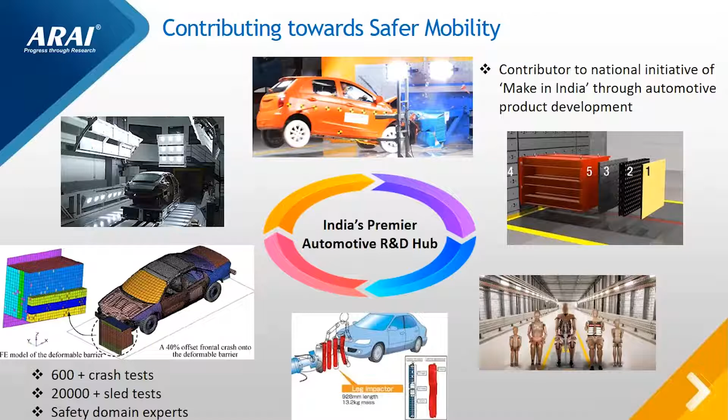So we are offering integrated services: engineering services, research and development, certification, education and training, and technology development as our portfolio of services. Now I'm going to talk more on how we are helping in promoting safe vehicles. ARAI has a state-of-art first public domain crash laboratory, and we have the pedestrian safety laboratory. We have a competency in both physical testing as well as virtual testing.

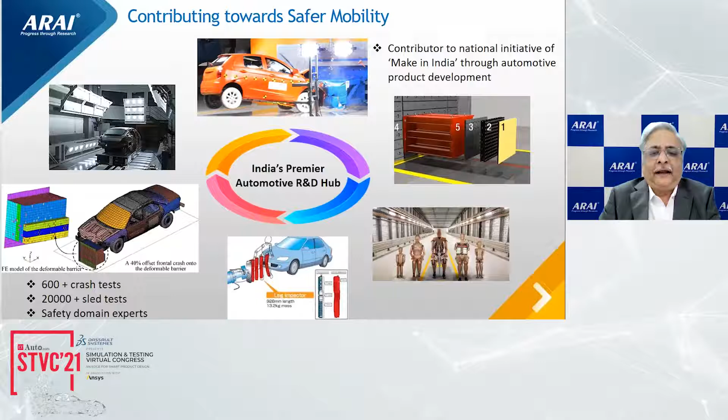As a matter of fact, when India raised its bar by certifying all the M1 category vehicles for crashworthiness, the last 3 years we were busy crashing the vehicles in our laboratory. 600 plus crash tests we have conducted in the laboratory, 20,000 plus sled tests we have conducted, and we have safety domain experts in both virtual testing as well as physical testing.

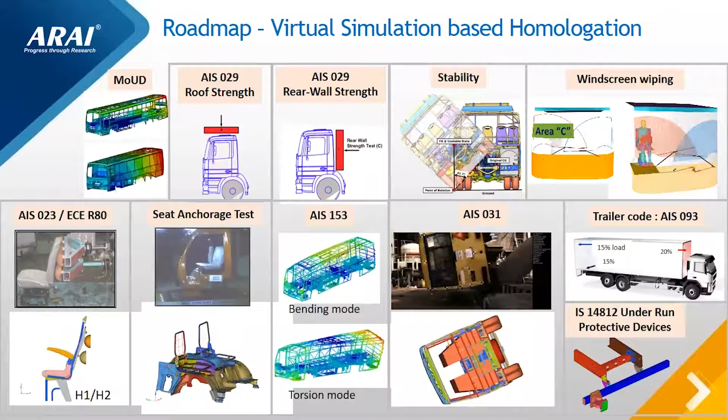This has been well tried out, whether it is the Ministry of Urban Development specification verification for bus structures or commercial vehicle structures for various automotive industry standards, be it the stability requirements for the buses, the rollover of the buses, on the component side, the seats and their anchorages, and particularly for the bus body. This has been a very useful procedure for combining the advantage of both physical testing as well as virtual testing.

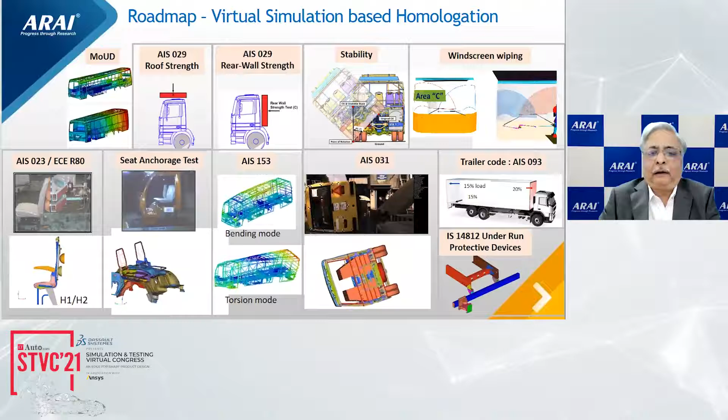In case of a bus rollover, where it is a destructive test, which side to roll over the bus, what is the worst criteria of the bus, and further these models help us in giving insight at the prototype stage itself. And not only that, we will see in the further slide how we are robustifying our assumptions.

Not only this, it has helped India in setting the global technical regulation for head restraint at a world forum, where our data was well accepted to assume that the biggest market needs are addressed. Also, we have made 16 digital dummies out of our data, and our hypothesis is that with 16 digital dummies, we are able to practically see the entire driving population for the interior of the vehicle. And this hypothesis was presented in Japan and was well received.

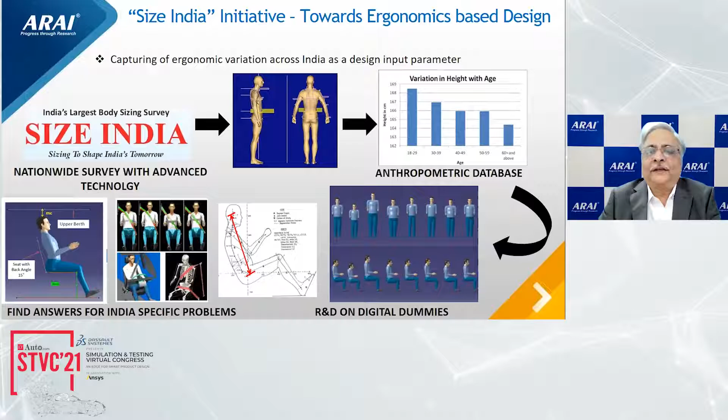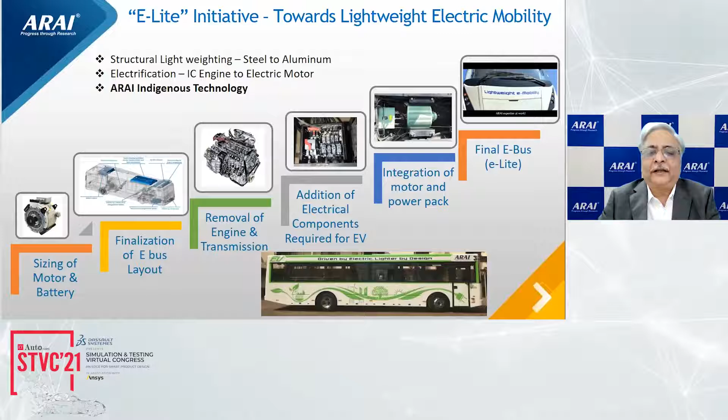Electrification was done from IC engine to electric motors. And ARAI has developed indigenous technology for joining the aluminum sections, and it is waiting for patent. This was demonstrated in Auto Expo at Delhi, and such fully developed prototypes are available at ARAI for anybody to look into. It has given a tremendous advantage of weight saving and extending the range for the electric vehicle. And in days to come, we expect that this technology will find a lot of applications.

This slide again is trying to show how we are smartly using the advantages of both virtual simulation as well as physical testing.

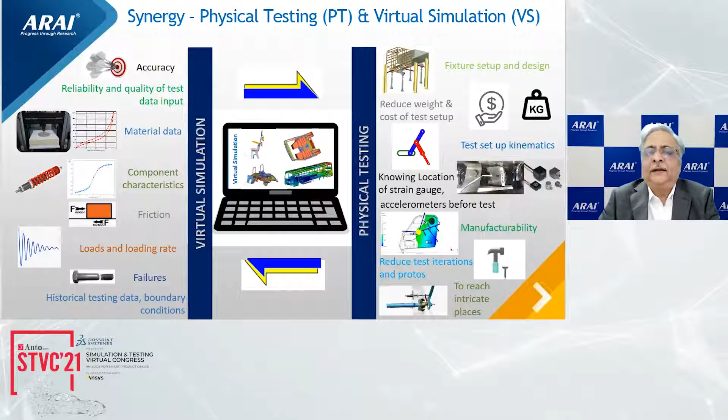We enhance the accuracy of our modeling, its reliability and quality, by injecting data such as material data from our data bank. Component characteristics, which are not taken from any data book but physically measured, are injected into the computer models. Parameters like friction, load, and loading rates are also used in the modeling, and this makes the model very robust; the failure modes are well exhibited and boundary condition assumptions are well tested. With this, we are able to combine the advantage of virtual simulation and physical testing together.

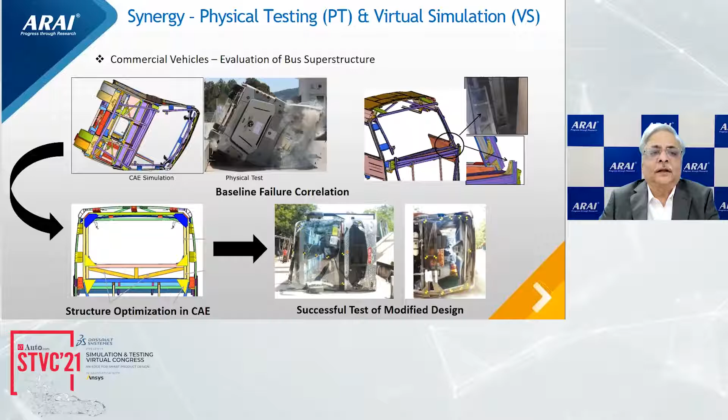The next slide shows how we have synergized our physical testing and virtual simulation techniques, particularly for commercial vehicle buses. India is a populous country and public transport is always a government priority. The evaluation of the superstructure of buses by both CAE simulation and physical rollover has helped ARAI come out with structures which are quite optimized, and we have successfully tested the modified design in accelerated mode. Here we have injected properties of the welded joints directly measured in the laboratory, which has given us a complete level of correlation between CAE simulation and physical testing.

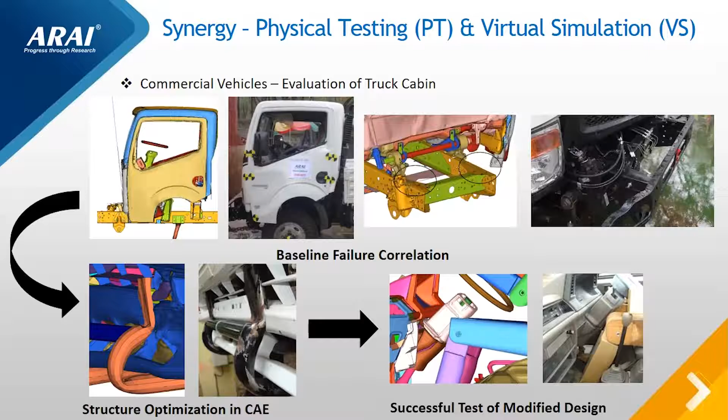This slide shows a similar success story for commercial vehicle evaluation of truck cabins, where we are able to both physically test and do CAE simulation of the commercial vehicle cabin for high energy input pendulum tests. This has been a widely used technique for accelerating validation in a short interval of time. With minimal iterations, we are able to come out with compliant cabins.

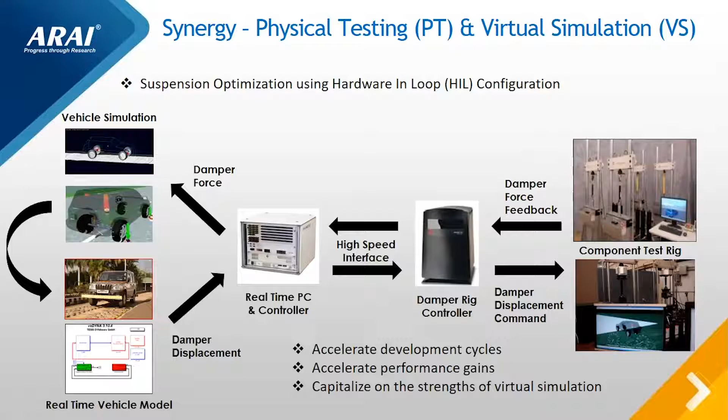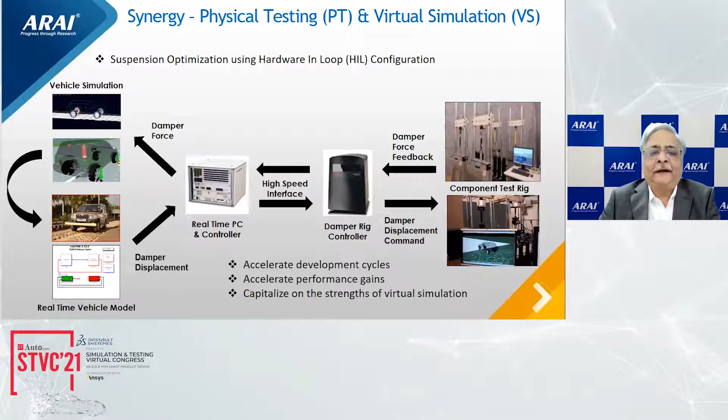The next slide is a little noisy. It shows how we are combining the advantage of virtual simulation and physical testing at ARAI for suspension optimization using a hardware-in-the-loop configuration. This slide shows a model prototype, where the vehicle is simulated well ahead of the prototype being ready, and we are able to test on a virtual proving ground. But here, mind well, we use the physical properties of the dampers injected from the test rig in real time into the model, and this makes the model robust. This combines the advantage of an accelerated development cycle and capitalizes on the strength of virtual simulation.

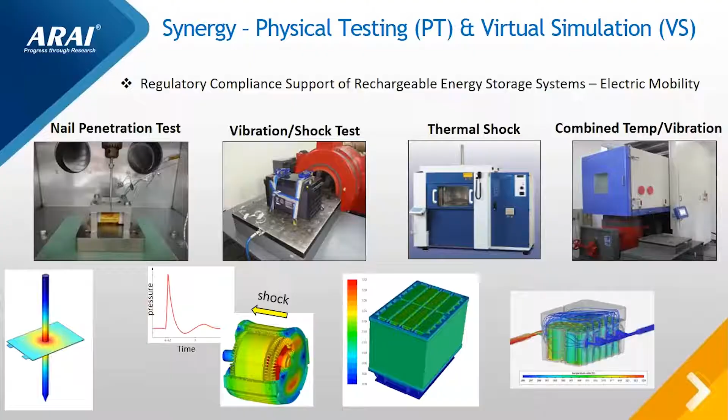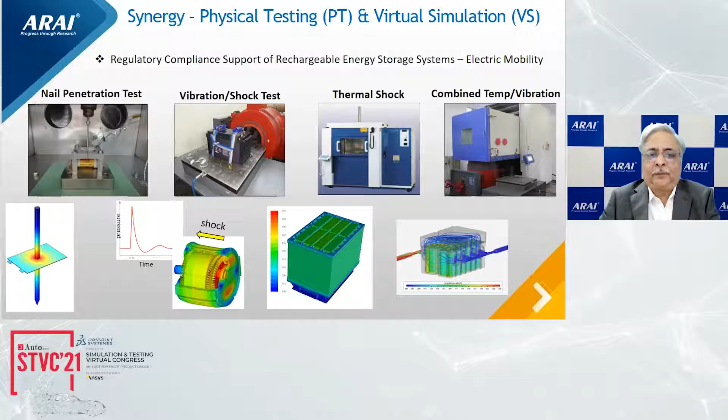This is a synergy for electric vehicle simulations. This is regulatory compliance support for rechargeable energy storage systems, where important tests like the nail penetration test, vibration and shock test, thermal shock test, combined temperature and vibration test, as well as heating, are done both physically and through computer simulation, which is the need of the hour. As the global technical regulation is being set, it demands much correlation, and ARAI is able to provide vital data to international forums also.

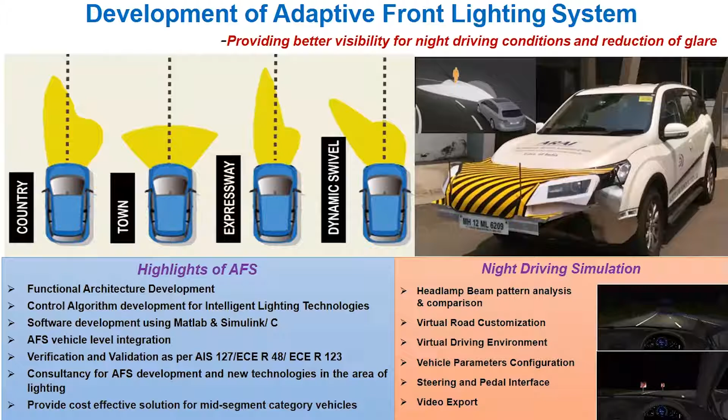The next slide brings a different flavor of simulation and testing combined to develop the complete technology for the adaptive front lighting system, what we call AFS. This combines providing night vision while driving with reducing glare, and this technology is being developed in a very cost-effective manner for mid-segment vehicles at ARAI. It combines virtual road customization, a virtual driving environment, vehicle parameter configuration, steering and pedal interfaces, and exports the video to combine the benefits of the technology. At ARAI we made the functional architecture, control algorithm, and software, and this technology was demonstrated on a mid-segment vehicle and is ready to go for commercialization.

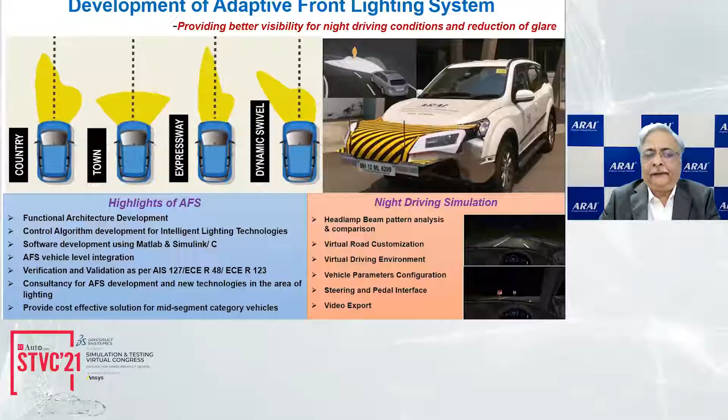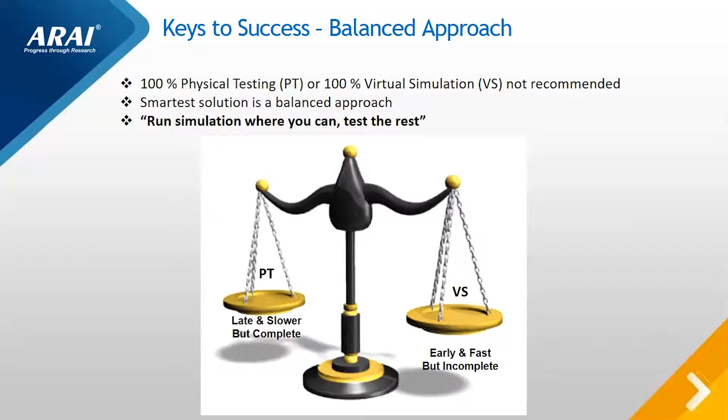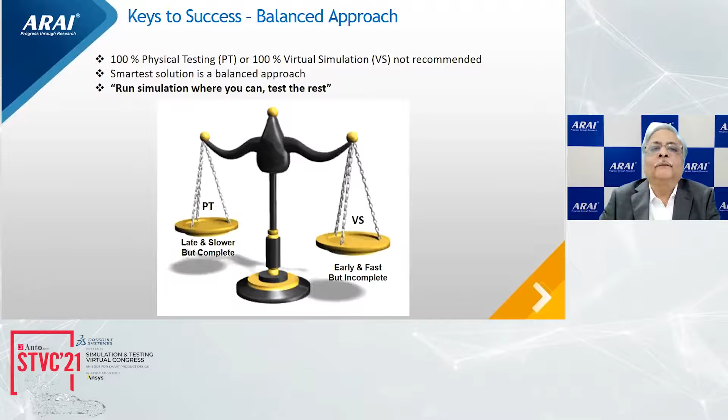Now this slide shows how we are balancing physical testing and simulation at ARAI. We understand that early and fast virtual simulation is required at an early stage, before the prototype is built, at the computer model level. However, we need full physical testing to prove the entire prototype. This is a little slower, but complete. So we are able to combine the advantages of both by balancing them. We say: run simulation where you can, test the rest. That's the punchline at ARAI.